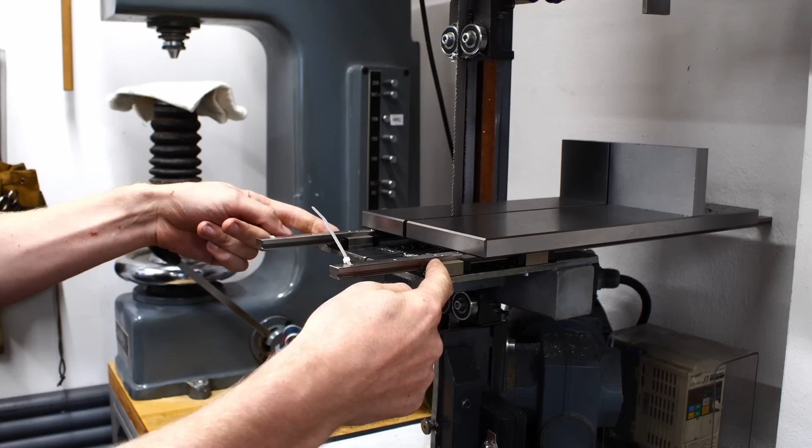People like Mössner sell vertical bandsaws with an infeed table too, for example with servo drive. So what I built here is, a friend of mine gave me two NSK linear rails size 12. Here you can see the trucks, there are 4 of them, and the linear rails, they are too long, I need to cut them down still. It's just for proof of concept now. 15mm thick steel plate for the table, ground, and a 70mm tall fence that's square on both sides of the blade.

Having the fence on both sides of the blade is important, so when you cut something, it's supported on both sides and just gives a nicer sawing experience. The fence on the back and the saw blade coming through, the idea behind that is to have a central clamp in front here that pushes the work back onto the fence. If you look up Robin Renzetti's roll-in saw, he has shown it numerous times on Instagram for different setups. That's exactly what I'm recreating here.

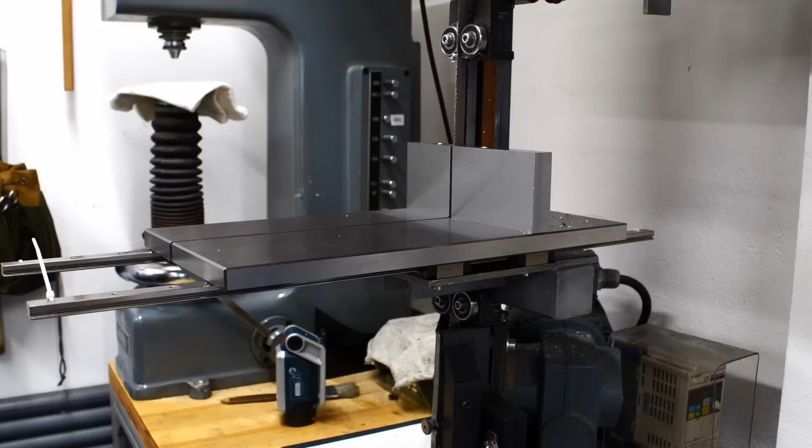I'm still waiting for the quick acting clamp that pushes up against the fence, but that's details. Definitely video coming on this. I'm working on it. It's built in a way so I can cut, I think, 150mm diameter max.

Since the fence is 70mm tall, the real limit is more like 140mm and smaller in diameter, because otherwise the center line of the round material goes over the fence. That's a little bit hard to hold, but 140mm is quite decent.

Also, the length of cut is 200mm, and if I need the saw as a regular contour bandsaw, I can just pull out these two screws, and these fences are doweled in. They are aligned with two dowel pins, and you can just pull these off and use it as a regular saw. It has no automatic infeed currently, it's just me pushing here, which is already way nicer than pushing the work over the table.

I'm thinking for an automatic feed either a very simple gravity feed, a big honking weight off the back of the machine with a wire rope, or a pneumatic cylinder that has an oil dampener added to it. So the idea is you put your work in here, you have your quick acting clamp, boom, pushing up against here, then you can just saw straight through the material.

And this allows you to split round material very closely to final thickness, especially if you start out with something that's already a round disc and very thin, and you just put it up with a square so it's vertical, and then you clamp it, and then you can just slice it through the center line, even if it's just 10mm thick. And that's something that I wanted for a very long time, because I like the bandsaw for material removal.

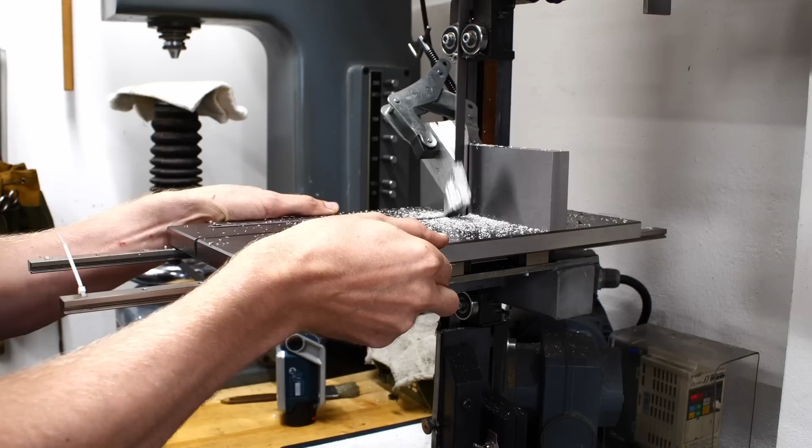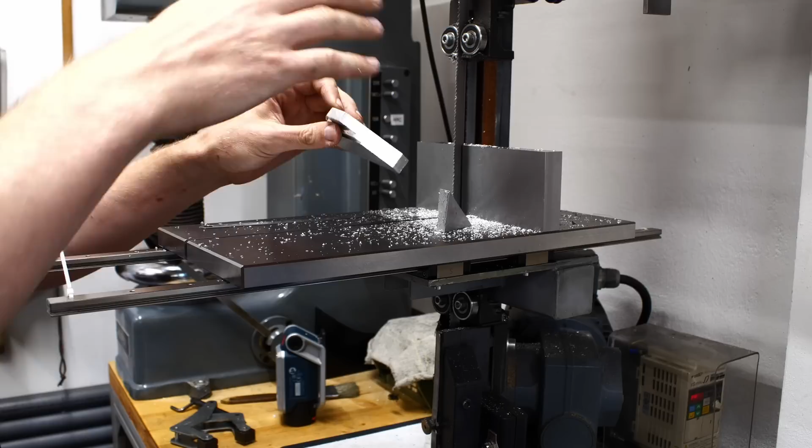And within the height limitations of the bandsaw, cutting straight lines with the length of the bandsaw like this, compared to cutting flat on the table like this, gives you a nicer cut. This gives a straighter cut and just overall a nicer finish, so you can cut with less stock for finishing, and also less waste. So that's very beneficial.

You can also do flat cuts like this. And of course you can also use it for material removal, like cutting out the corner. So the possibilities with a bandsaw are endless.

And I think a vertical bandsaw is way more valuable for a shop than a horizontal bandsaw. With a horizontal bandsaw you can basically only cut off material from a stick. Yes, you have options like bolting things to an angle plate and holding that in a vise, but a vertical bandsaw in my mind gives you way more saw for less footprint. So keep your eyes open for the video on this thing. It will take some time because I'm waiting for the quick action clamp here.

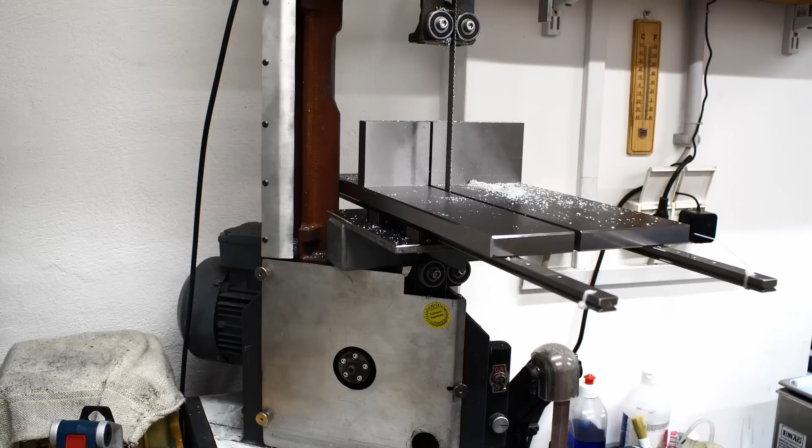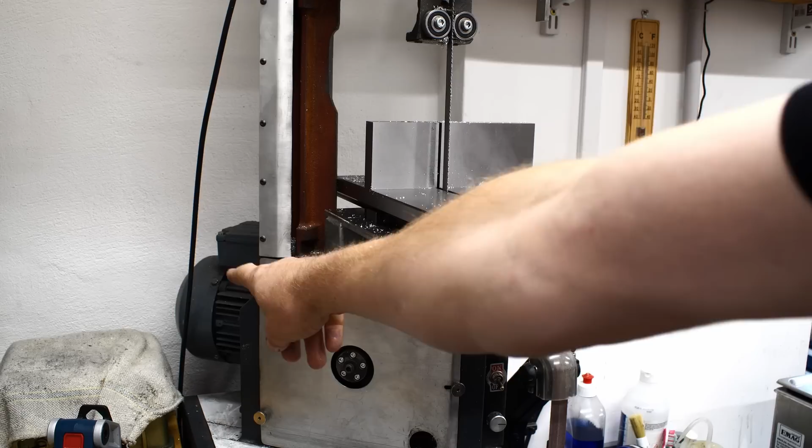And for those who don't know this saw, this is basically the standard 4x6 bandsaw that's sold by everybody in the US, Grizzly, Harbor Freight. I took it off the stand, I removed all things not necessary, put it on a stand, made a table for it, and now added this infeed table of course. And I also replaced the original motor and gearbox with an industrial motor and a worm gearbox because the old one died on me. That's the bandsaw infeed table.

I also did some recreational purchases for the Deckel FP1 tool room milling machine. To be honest, it's two pieces of equipment that I do not really need, but that I really wanted. One is the 40 taper high-speed head that runs 6,000 RPM, and the other one is an XY compound slide that fits on top of the indexing head, and that's used to machine multiple radii on top of the indexing head.

And there is a famous Palmgren XY rotary table. Adam Savage recently showed this thing on Tested, and they built it the wrong way around. They have the XY table and the rotary table on top, and that doesn't really make sense as a combination. That's just a rotary table and an XY table. But if you do it the other way around, if you have a rotary and an XY table on top, you can use the XY table on top to shift around the center of rotation of your workpiece. I will show that to you in a second on the real deal. But be aware of those Palmgren tables.

They are kind of obscure and nobody really seems to know what they're made for. This will be a quick one because I need to tear it down first. I need to fix a few things on it. But this is one of my recreational purchases for the Deckel FP1 milling machine. This was more a want-have than a need.

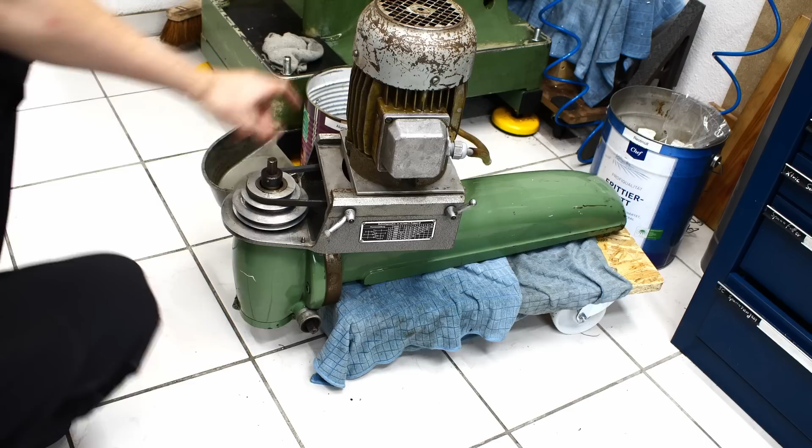This is a 40 taper high-speed head running up to 6,000 RPM. It has a separate motor and a belt drive for the spindle. So compared to the mill itself with its main spindle, these are rather quiet because there's only a 3-phase motor. I think it's 0.5 kilowatts, 0.75 kilowatt. So quite the monster. Not really. Belt drive and the spindle.

The spindle is a different design. It looks the same like the milling machine. It also has a quill with 16 millimeters travel, 40 taper internal, so it takes the regular tooling from my mill.

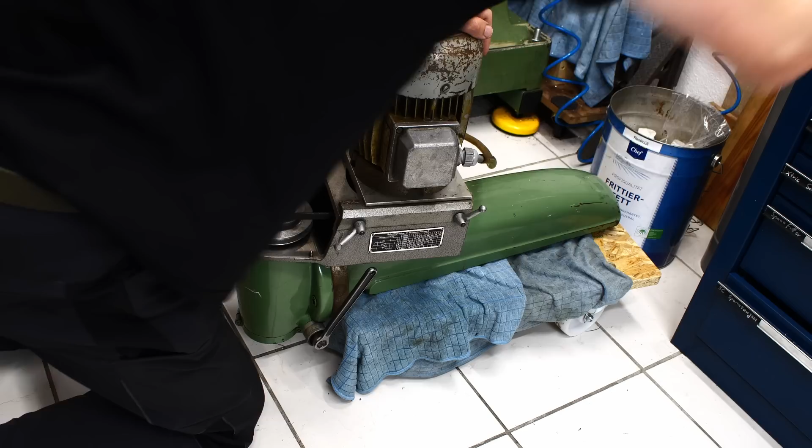But the Deckel FP1 main spindle, the geared head, is needle bearing, and this one is angular contact bearing. So these run a little bit smoother. They cannot take as much load as the needle bearing head, but they are a little bit, well, smoother.

But as you can see, it's very grimy. It needs a little bit of love. The dial here has some rust on it. Well, could also be just caked on dirt. I think I'm going to take the quill apart, or the spindle, because the bearings sound a little bit dry. I hope there is nothing wrong with them. So that's the high-speed head.

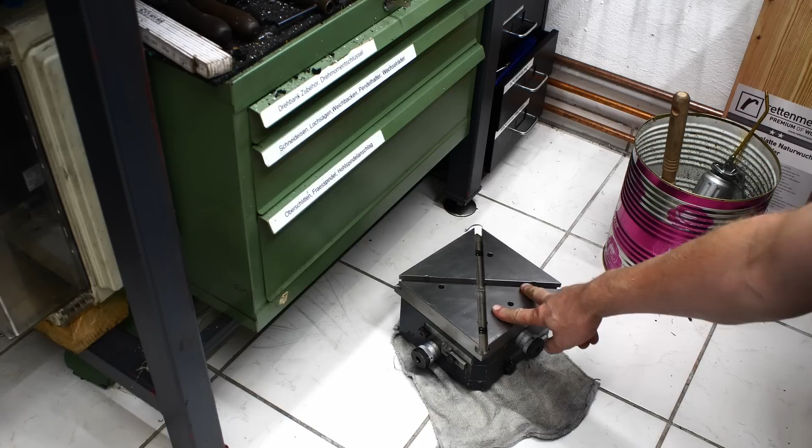I'm running out of places where to put accessories for the milling machine. Down here I have the XY table that goes on top of the indexing head, and I have a short video section on the usage of this thing. Not a detailed view yet, but you will get an idea what this is for. So let's have a look.

I got a quiz for you. What does a 1,000-kilometer road trip, meeting some friends that you only know from the internet, and a one-night stay in an artist's Airbnb give you? Well, some accessories for the Deckel FP1 tool room milling machine. We got a faceplate. Both of these accessories fit the indexing head.

I have an original faceplate, which is 300 millimeter in diameter. This almost acts like a mill table. You use this just like on the lathe. You use strap clamps or C-clamps, cam-twist clamps to hold work to it. And if you're a little bit of a savage, you can also drill and tap holes into it as needed. A lot of people do that, and most of the used faceplates, well, they look like that.

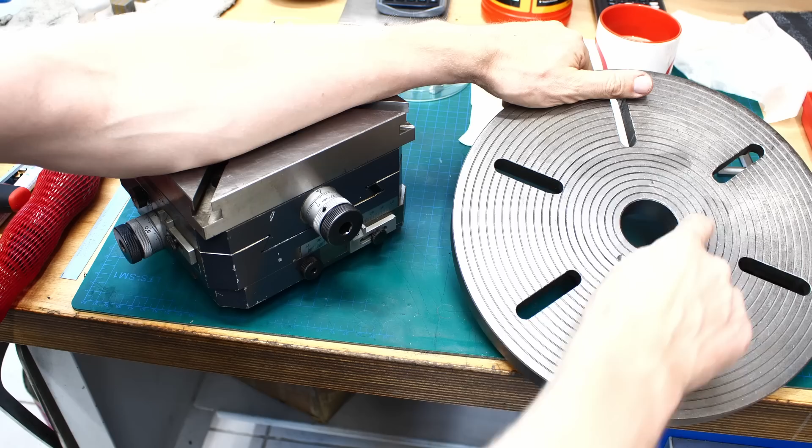This one is in excellent condition. It only has these 4 drill marks where somebody drilled a hole circle slightly too deep. But at least after 4 holes they noticed it. Apart from that, it's just a little bit dinged up. Should be fine after a light stoning.

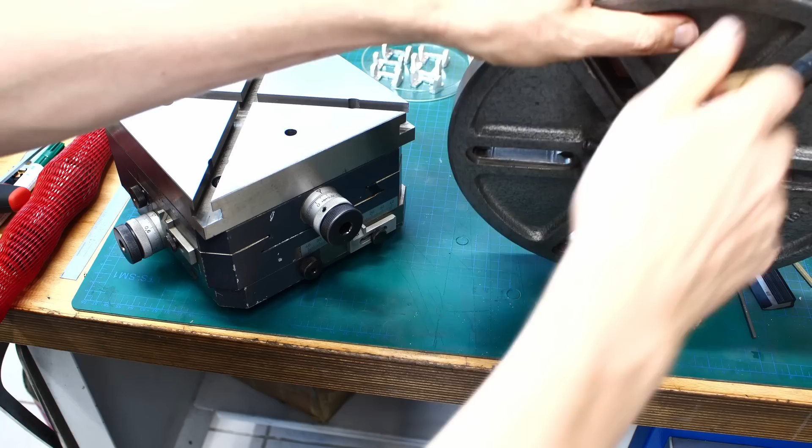And all these accessories have the interface, a cylindrical register with the 4 set screws that directly goes onto the face of the indexing head. I was very skeptical about this interface, but this is really rock solid and surprisingly repeatable.

This thing is bloody heavy, but this thing is even more so. This is basically a solid chunk of iron. What's this? Well, it's heavy. It has the same interface that goes on to the indexing head on the back side. And then it's basically a cross slide. It has an x-axis and a y-axis, graduated in 10 micron increments on the dials here, very nicely made. Has engraved scales on here and an adjustable 0-point marker.

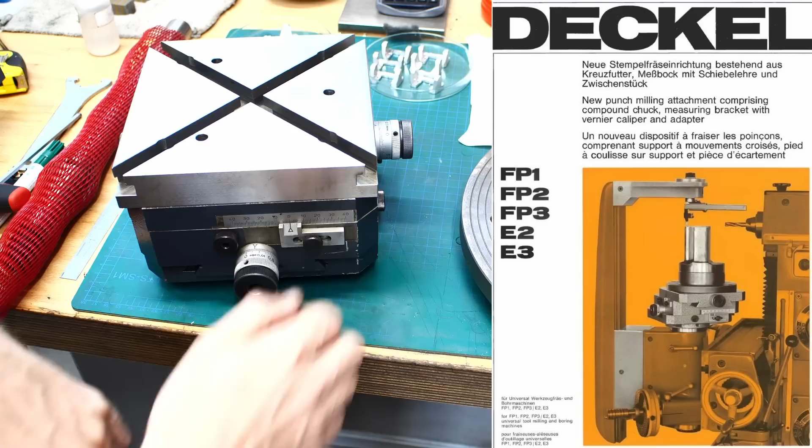So what's it used for? This belongs to the punch milling accessory or the punch milling system. You use this on the indexing head, you put your part on top of it, and when you want to mill radii, you always need to put the center of the radii that you want to mill on center with the axis of the indexing head. Normally you do that by tapping the work around and indicating it in with a dial indicator.

This makes it a little bit easier, especially if you have more than one radius to machine, because you can just offset the part in its setup without resetting it up and move it to its new center location, machine the radius. Then you can shift to the next radius, and that way you can machine quite complicated geometries on a manual milling machine using a rotary table without having to re-set up for every single radius. I will put this on a milling machine and we will see how this works out.

Okay, let's quickly look into the manual of the Deckel FP4M.

This has to be the nicest illustrated machine tool manual ever. They had these extremely nice hand-drawn pencil sketches for everything in regards of the machine. And here is the compound chuck. That's what they called it. Use of the attachments, number 7, compound chuck. And yes, this is for the Deckel FP4M, which is a substantially larger machine, but the idea is the same.

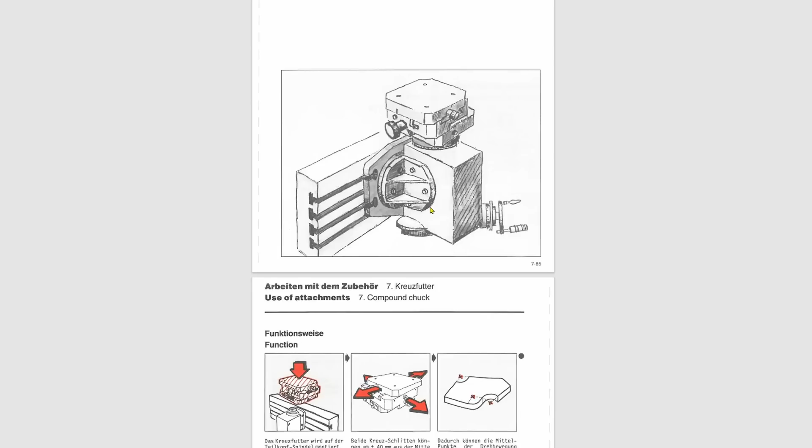So it's used in conjunction with the index head for machining contours composed of straight lines and circular arcs. And that's exactly what it is. It's a very fitting description. Here you can see it up against the apron with the indexing head. The indexing head is the same as on the Deckel FP1. They used it up to the size 4 machines.

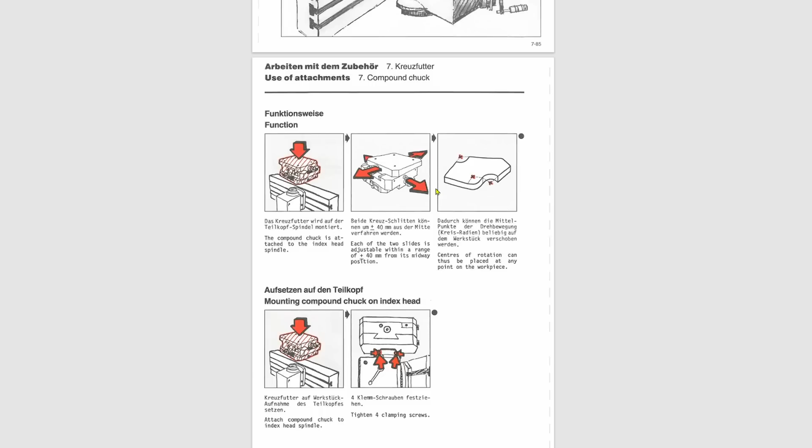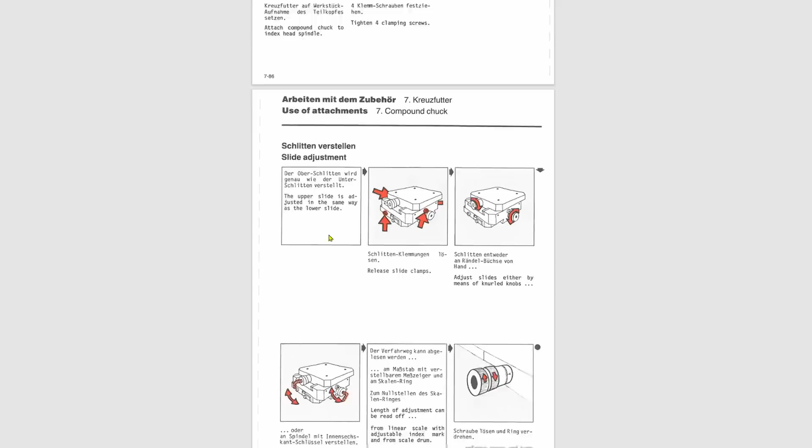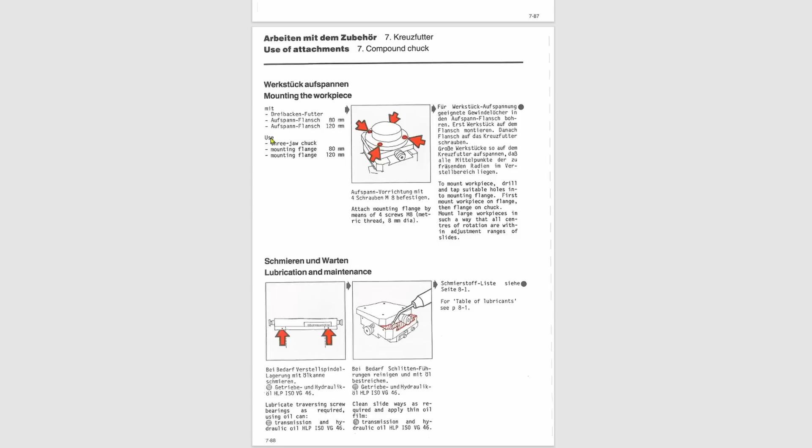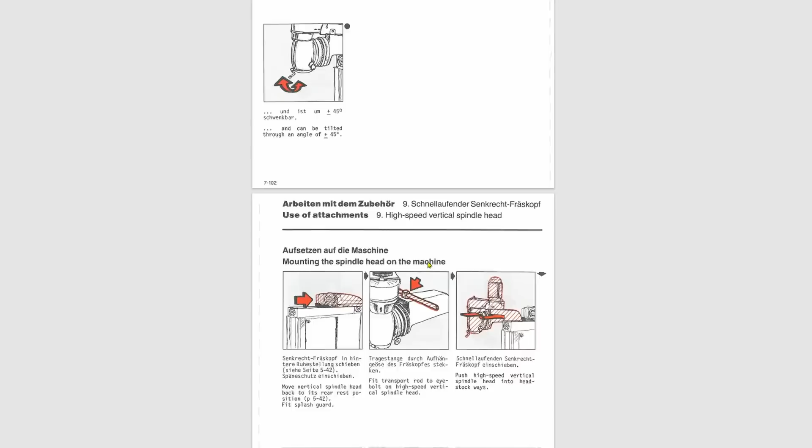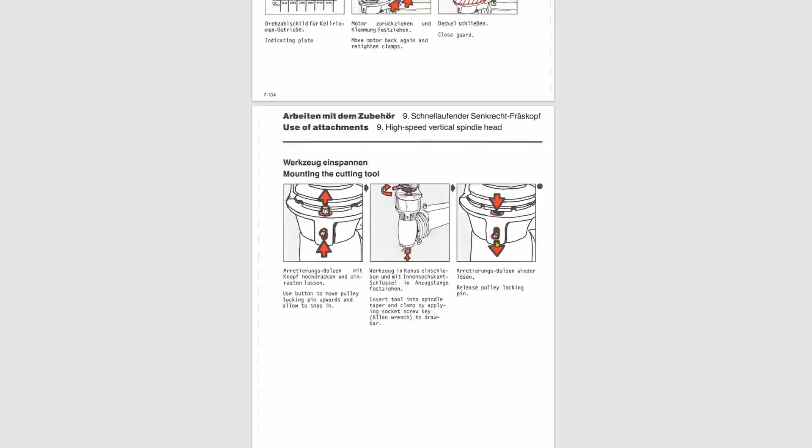There are other things too, spiral milling attachment, which is a fairly complicated item to operate. There is the FP4 high-speed head, which is a little bit different. This one already has a spindle lock to lock the spindle on the push of a button, which my high-speed head doesn't have. So changing tools on these is always a little bit painful. You can't put them in low gear to lock the spindle either. The FP4 also had a double swiveling angle head to mill compound angles.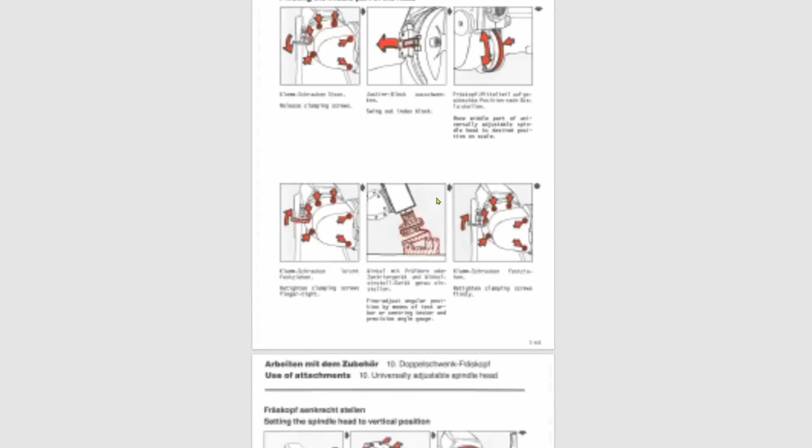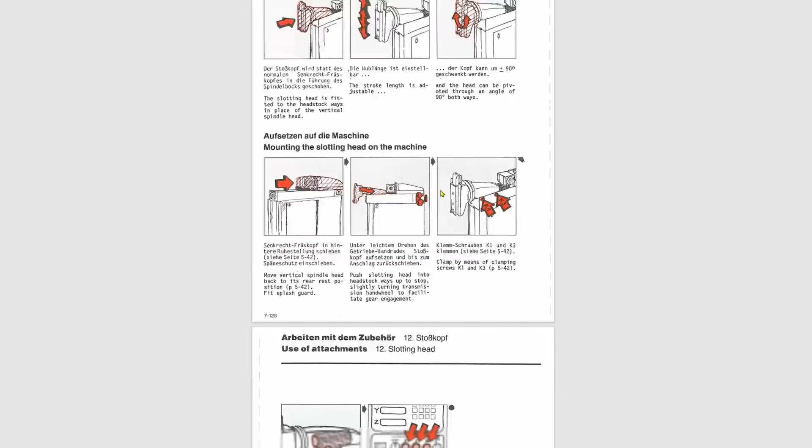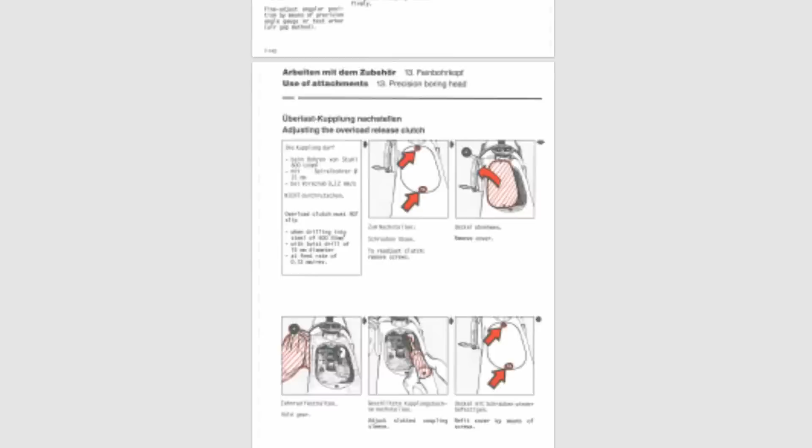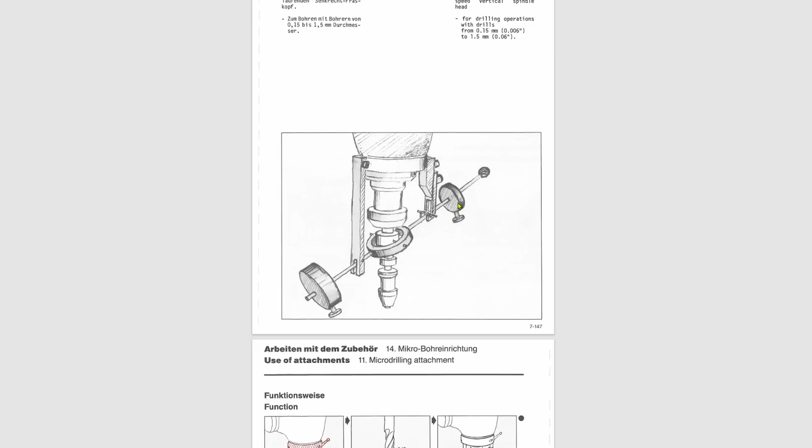So this manual shows up on the internet. It's quite interesting to see what's possible and to see some of the accessories that you rarely see on the internet. Slotting head, precision boring head. I think they even show the grinding head. This is the micro drilling attachment. This goes onto the end of the quill to drill from 0.15 to 1.5 millimeter holes using gravity feed. You balance it out with those 2 weights, and then you offset one of the weights a little bit, and then you can just drill with gravity feed.

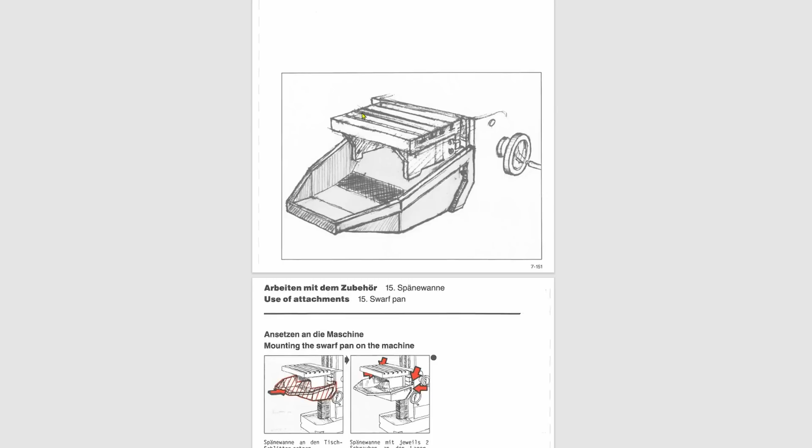This was pretty nice on the Deckel FP M and NC machines, on the controlled machines. There's a chip pan that hooks up to the apron and kept the mess to a reasonable level, but still allowed you to access the milling machine completely all the way around. If you run flood coolant, it's a pain because you spray the entire surrounding of the machine.

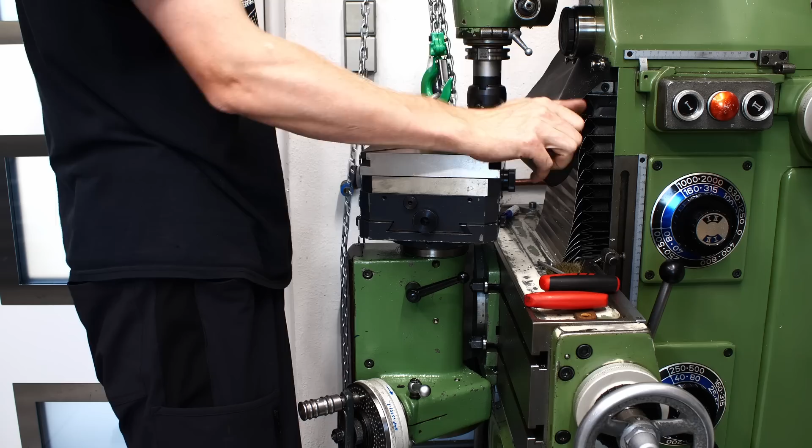Since the sliding chuck is so heavy, it's a little bit tricky to get it onto the indexing head. I tried it by hand, but lifting it on top of the cylindrical register boss of the indexing head and getting it into alignment is quite tough. So using the overhead crane makes it way simpler. And my lifting eye attachment that I use for the rigid table of the mill also fits the T-slot of this sliding XY chuck.

Once it is in place, you just tighten the 4 set screws that engage into matching dimples in the nose of the indexing head, and they are positioned in a way so that they pull down the item that you mount on the indexing head face. They contact at the sides of the dimples that are drilled into the spindle. And in the ideal case, you tighten them crossover, opposite sides and then 90 degrees the same, just like you would tighten wheel nuts on a car.

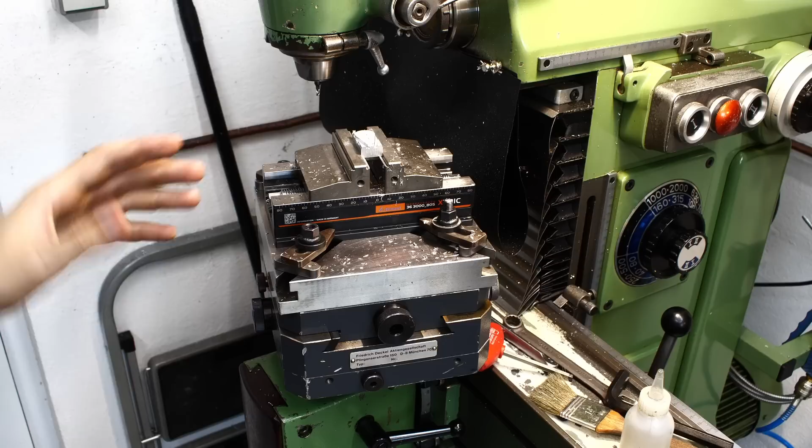As you can see, the thing sits on the indexing head. I put one of the self-centering vices on top of it. The T-slot plate here is shop made. That did not come with the XY chuck. Deckel called it a Verschiebefutter, which means literally a sliding chuck. What it really is is an XY cross table.

And it just had a few threaded holes in the top plate, but somebody at the former place this thing lived in made this T-slot plate with the 45-degree offset T-slots. It looks nice, but I'm not the biggest fan of the 45-degree T-slots. Not so sure about that. But with the self-centering vise on top, it seems to work out.

I did a little bit of machining on a piece of aluminium, and I will zoom in in a second. And all I can say, this XY slide on top of a rotary axis is a complete mind bender. My head hurts from doing just this simple part without any precision needs.

Just to figuring out which axis to move at which time. Ignore the witness marks in the center. This is just really super rough, done with an end mill in one roughing pass. No finishing, no nothing. Just to figure out the geometry that this table creates.

So I have two radii on both ends of this contour, and they're connected with a tangent line on each side, and each of them has a central bore. And it's all done in one setup without disturbing the part, which is kind of cool, I have to say.

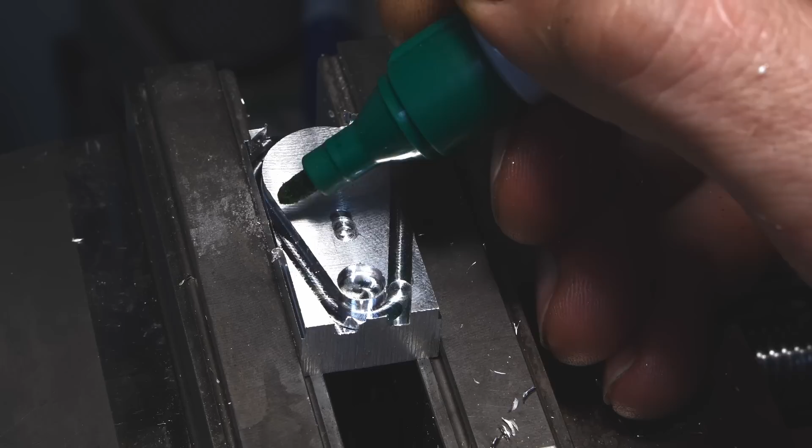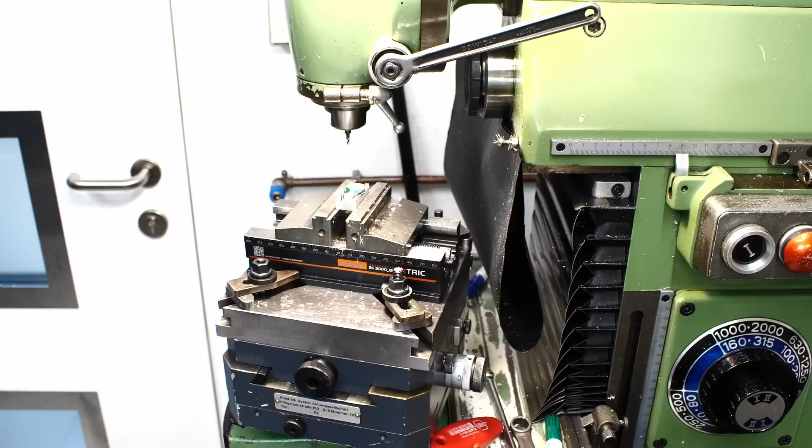So let's add some more features. Let's add a radius cutout on both sides, like this. Just eyeball, nothing precision, just to give you an idea of how you operate this. So this is not a manual video or a tutorial. This is an absolute, Stefan tries to figure out a new piece of equipment, which he is absolutely excited about.

So for starters, I put the indexing head back in its 0-degree position, because it just makes things easier to figure out. So then we crank the x-axis back to 0, because that's the center of rotation. Well, and also in the y direction. Okay, now we are at the last center position that I used on this contour, which is the center of this rear bore.

So to get my center position over to my cutouts that I want to cut, I'm using the x-axis of this cross slide, and I crank it over. And I could use now the dials to exactly find my geometric center. Okay. Now if I went down and if I rotated the part, I would cut a hole in the center of my geometry. Just like this.

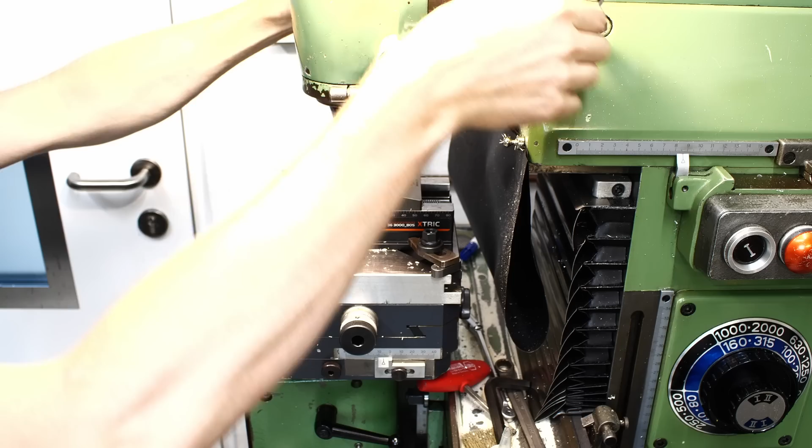So I'm moving over, let's say, 6 millimeters, which gives me kind of the outside contour here. Now I can plunge down and start machining my radius. Okay, cut number 1 on this side.

And now I need to go to the other side of my contour. I cannot move the y-axis of the machine, otherwise I would just cut a larger radius. I need to shift the part on the rotary axis of the indexing head. So let's go back to 0 and then 6 millimeters in the other direction. Of course, since we're using dials, we have to consider backlash, so we go over 6 millimeters and then we go back.

So here's 0, and we could also lock all the axes, but let's not overcomplicate things. So let's start at 0 again, plunge down, and then we rotate out to our diameter. Okay, yeah, so now we added those two features too, without having to reset up. And that way you can create a whole bunch of machining operations without disturbing the setup. I guess we push this back under the lathe until I need it in 5 years.

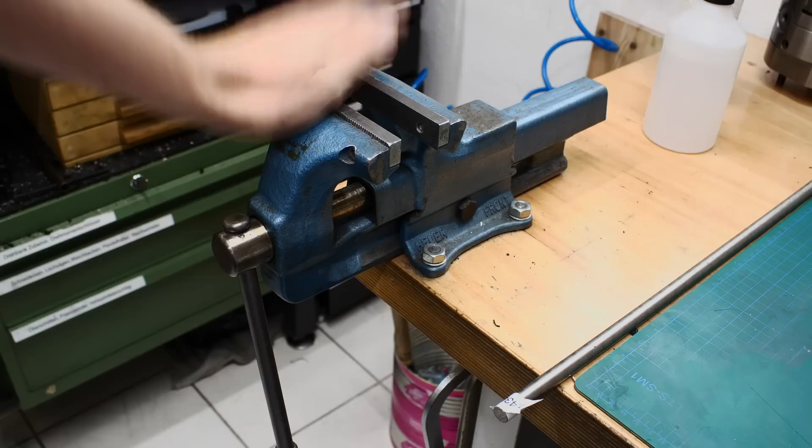Quick word on bench vises. I think, well, yes, you need a decent bench vise. These days, this is my preference. Heuer Brockhaus. These are forged, not cast. They are quite hard to destroy. Yes, you can destroy them if you watch Fireball Tool, but in regular shop use, you will have a hard time breaking one of these. You can pick them up on the used market for very little money.

The problem with these is they come with serrated jaws, like a flat knurl, and to be honest, that's quite useless for 99% of general shop use, because who likes a nice flat knurl in his work? What I do when I get these vises in, and we did that at work too, we take out the jaws, that's the original flat knurling.

Looks like it's done with a large fly cutter at a high feed. We take the jaws, we flip them around, we surface grind them, and you have to resurface grind them from time to time. And we use them that way. Our preference always has been hardened jaws and very smooth. With those, if you keep them clean, you don't leave marks on workpieces.

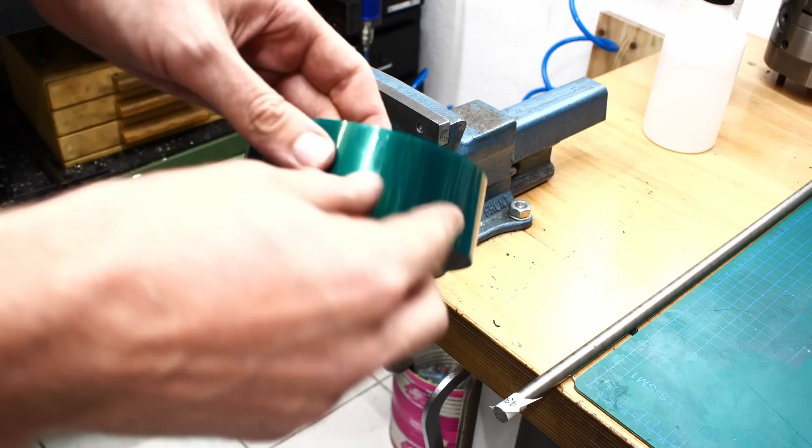So if I need a real jaw that's not scratching, for example, a black oxide finish, I will put on this stuff. This is powder tape, very, very resistant plastic tape, or regular blue masking tape. Put it on the jaws, and then you can work on parts without leaving micro scratches on very soft materials or very sensitive parts like black oxide or anodized surfaces. So that's my 5 cents on bench vises for a machine shop.

There is also the other style that's also very common here in Europe, the Boley or Lienen vises that are cast, where the jaw is moving on the back. Those are also very nice, but they have one drawback. With this style here, with the front moving jaw, you can clamp long parts and have them extend down the bench if you have mounted it far enough to the front of the bench, of course. With the rear moving jaw, you can do that only extremely limited. So that's one of the reasons why I changed from the Boley vise that I used to have to the Heuer vise. Picked this up used, cost me like 50 bucks and one drive with the car.

Also, there are all these super large and huge vises and people having 17 vises in their machine shop, and I'm not sure why. Maybe it's the kind of work I do. I get very far with a single 100mm wide vise. And if I need a really strong vise, I can always clamp stuff to either my large drill press table or to my milling machine table. That's 500 or 700 kilos of mass that help me to work on stuff. At work we always bolted one of these bending fixtures to bend flat stock, but we just held that on the milling machine because it was a nice hard point to mount it.

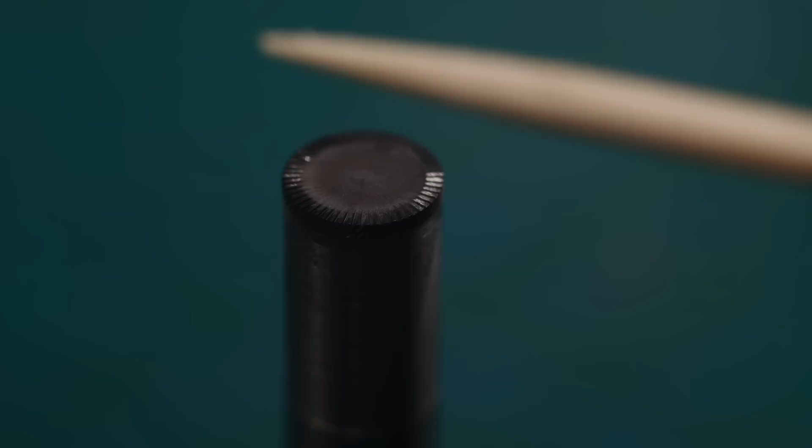And this is a 50 flute diamond end mill. This is 6mm diameter across, has 50 flutes, and there is a piece of, I think it's polycrystalline diamond, brazed to the end of a carbide shank, and then the cutting geometry is formed with laser into the diamond. And this is by no means a cheap tool. This is close to 4 figures. A very generous person sent this over to me. Let's call him the guardian angel of this channel.

And I want to fart around with it. Well, I will do minimal farting because, as I said, this is a horrendously expensive tool, and maybe there will be the day where I can use it for something useful apart from doing a 5-minute video here on YouTube. So you see the cutting geometry, and this end mill is made to cut tungsten carbide. And it's made to cut certain ceramics like zirconia.

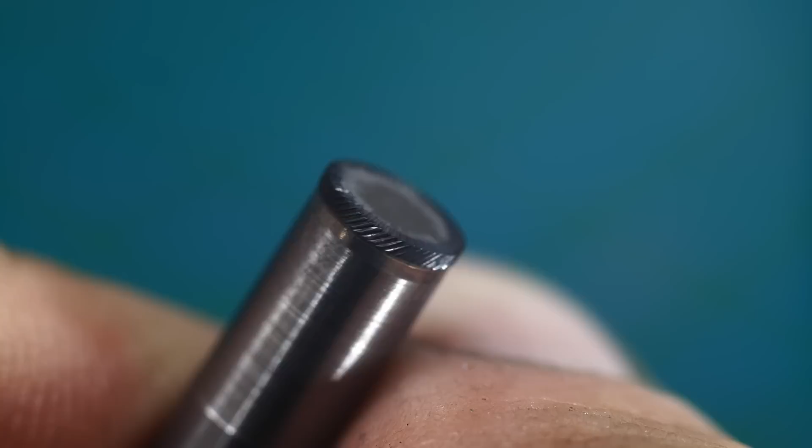What? You can't machine carbide. Well, you can, and you can for quite some time by now. At my day job we use tooling from 6C to do drilling and thread milling in carbide, a few years ago already. It worked quite well. When you do thread milling in carbide, the threads come out beautiful, way nicer than many tapped threads in steel.

So we have this end mill, and it is actually cutting, not grinding. So it is a mill, or an end mill. It's completely insane when you look at it. Normally you would use this on a machining center with very controlled cutting conditions. I have 2 machines that can run this end mill: the Sorotec CNC router and the Deckel FP1.

The interesting thing about this, as far as I know, and I'm no expert at all, you can scale the cutting parameters for these up and down very far. I'm running this at 2000 RPM on the Deckel mill with 20 millimeters per minute feed. You can calculate the chip per tooth yourself.

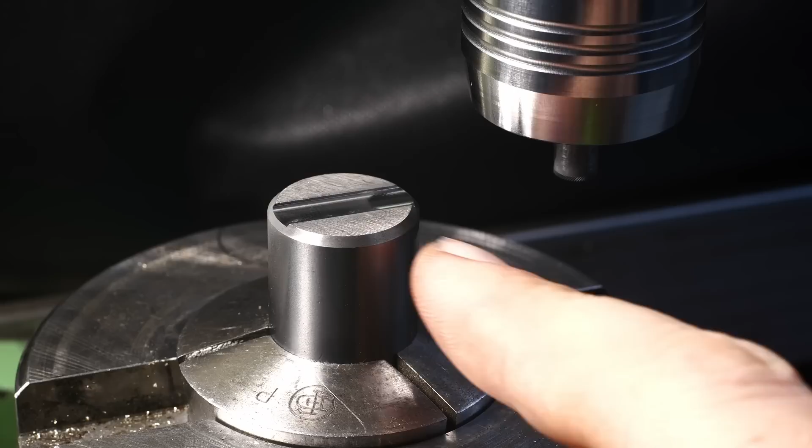This was milling carbide with a specialized end mill for cutting carbides and ceramics. As you saw, the cut runs relatively uneventful. The only problem that you have is the fine carbide dust that you're blowing all over the shop, because you have to run these cutters with compressed air, because I suspect they don't like recutting carbide dust or carbide chips with their flutes.

And this is, I think, a 50 flute 6mm end mill with a solid diamond end. And the flutes are, I think, laser cut into the diamond. So this is very wild technology here. But it's approachable if you have like $900 for an end mill. It can be done on normal CNC machining centers; you don't necessarily need something like a Kern Micro HD or a hard cut machine like a Röders or a Kitamura. You can approach this on normal machining centers.

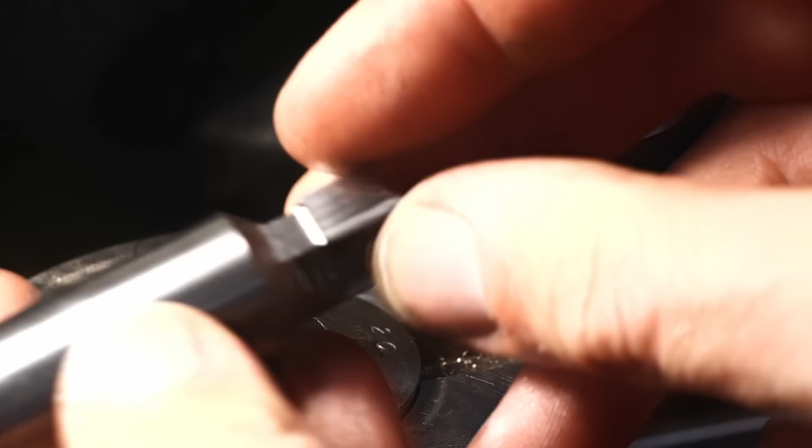They also make drills and thread mills to cut into carbide. It's interesting technology, nothing I will use in general here in my shop. This was just a fun little test with one of those end mills, cutting a 6mm wide, 0.5mm deep slot in 5 passes into this piece of carbide. That's a piece of carbide, a 20mm carbide shank, and there is some machined feature on the other end. Somebody did some milling trials on it already. So that's my test cutting carbide.

I will put this end mill away and keep it until the day I absolutely have no other choice than to use it. But that's probably the first time somebody has cut carbide with a dedicated 50 flute PKD end mill on a Deckel FP1.

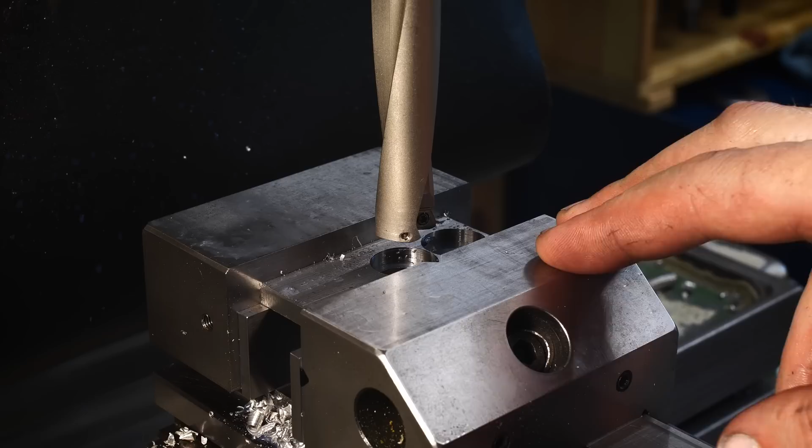Back to my new hobby of putting inappropriate tooling in ancient manual equipment. Here I have an ISCAR 19mm inserted drill. It has 2 inserts, one here, one on the other side. You usually see these on proper industrial CNC equipment, vertical machining centers, horizontal mills, and CNC lathes to remove a lot of stock in a short amount of time. You rarely see them used on manual machines, and I'm not entirely sure why.

A toolmaker friend of mine from Liechtenstein used a slightly smaller one. When I visited him, I noticed that he had one of these in a multifix tool holder on his small Schaublin 102 lathe, and he told me it works fine. You have to take a little bit more time than on a real 40 or 50 taper VMC, but it works and it's good to remove a lot of stock.

So a good friend of mine gave me this ISCAR drill, and I wanted to put it in the EMCO lathe, but currently I don't have a reducer sleeve for a 25mm shank to go in a boring bar holder. So I figured I have a 25mm collet for the Deckel FP1, and that's a rigid machine for its size, so let's give it a shot here. Teaser, you can see 2 holes here. It works, and boy does it work. So let's move the table over.

I'm using it like a regular drill with the quill, not power feeding, because I currently have absolutely no base of understanding how they behave without high pressure through coolant. Normally these drills are used with through spindle coolant, meaning coolant shoots down from the spindle through the tool holder, and there are channels drilled inside the tool and the coolant shoots out the end. I don't have that on the machine obviously because it's ancient, but I have a little squirt bottle, so let's give it a shot. 630 RPM, and this is mild steel.

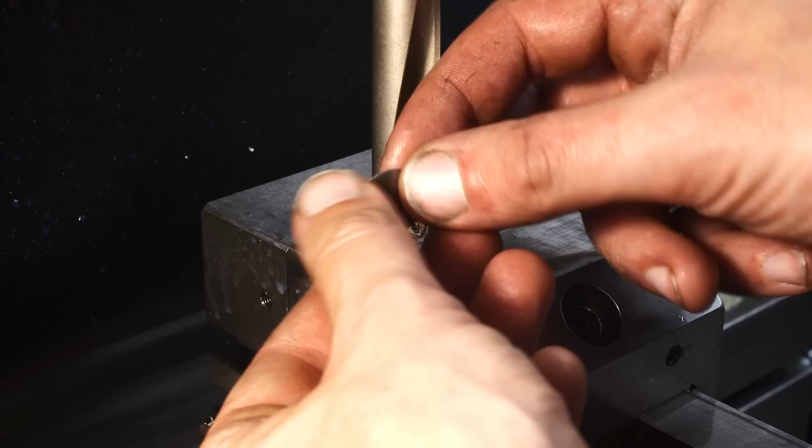This works way better than it should, in my opinion. These drills, when they break through, cut out this disc of material, super sharp on the edges. I heard stories that on CNC lathes and open frame tool room lathes these will fling out to the side and be a little bit dangerous. But on a mill, this doesn't seem to be a problem.

But you heard that the cut is really quiet, and there is not even a hint of chatter, no scratching noises. It's just behaving extremely well. And the pressure on the quill handle: I don't like large twist drills a lot. Without pre-drilling, they always seem to take a lot of force to get them to cut nicely. And this cuts really nice compared to a twist drill the same size without pre-drilling.

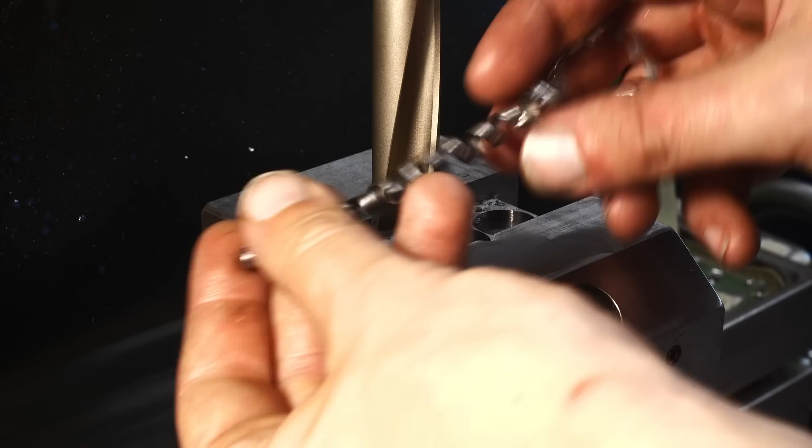It's not super fast. I think I could push it harder so it breaks the chip, but then I get into problems with coolant, I guess. Disclaimer, I have no real world experience with these on real machines, it's only what I see in videos. But these usually seem to break the chip extremely coarse when you feed them hard enough. They put out small curls of chip. You saw by hand feeding, I create this style of chip that doesn't break, but it comes out the flutes of the drill.

So yeah, seems like you can use these on manual equipment, and maybe it's kind of useful. I will keep this drill around. I have a box of inserts for it, so maybe this will find its way into my tooling setup here in the shop, and maybe you see it a little bit more in future. But I'm mighty impressed. I would not have expected this to work as good.

Here you can see the finish that the drill leaves. It has a little bit of scoring marks, probably because of the lack of coolant, but overall it's a nice bore. And as for tolerance, these don't seem to be precision tools because it drills undersized, as far as I can tell. On a CNC lathe, I heard that you can use them to drill out a hole and then put them off center and bore out the hole to final size. But I'm not sure if that goes that well with the insert geometry in this tool. We will look at the tool on the bench in a second.

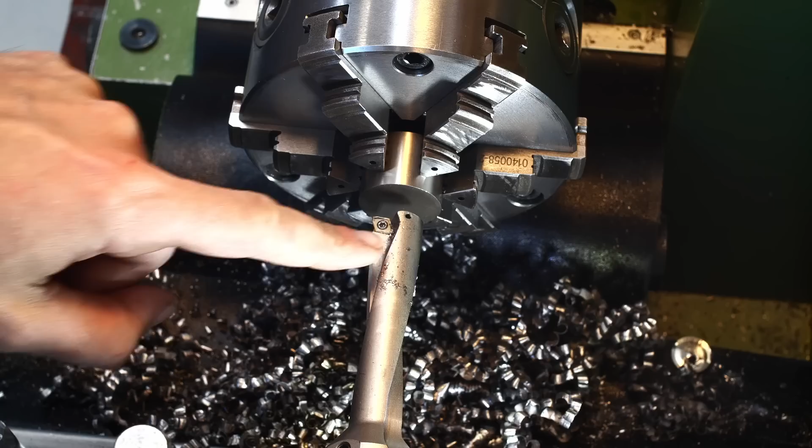I made a sleeve to use the inserted drill over here on the lathe, and well, I'm running out of stock that I can poke holes into. So this is a piece of 303 stainless. This should go fine, running at 600 RPM and hand feeding again.

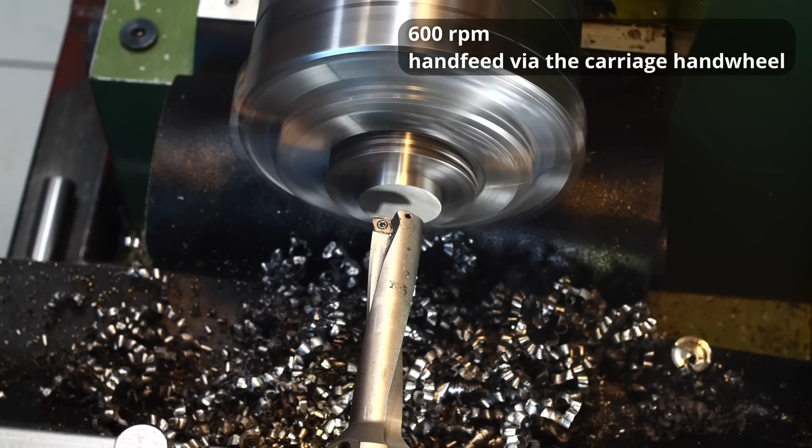So it works too, but over here on the lathe, it's not as stable as on the Deckel milling machine. The Emco is significantly less stiff than the milling machine. That's for sure. That's a weight difference of almost times 3. The Emco is about 200 and something kilograms, and the Deckel FP1 in its configuration is more like 700 kilograms. And all the components are just more beefy.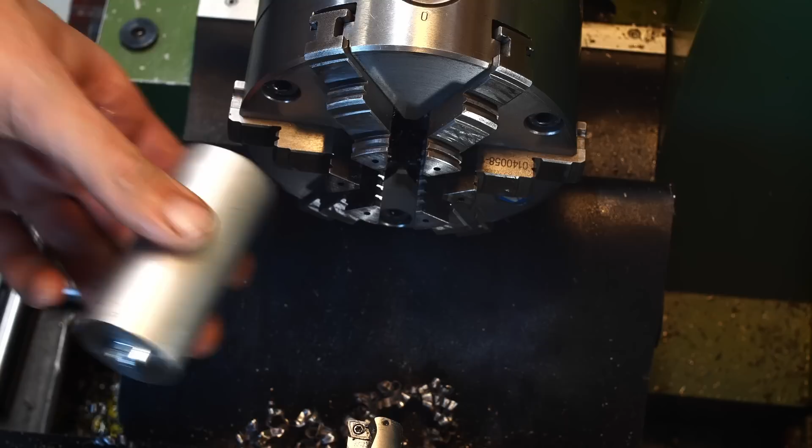It works here on the lathe just as on the milling machine, but I think the lathe is less stiff. Well, it is. I don't need to think. The lathe is about 200 and something kilograms, and the Deckel FP1 in its configuration like I have it is about 700 kilograms. And all the components on the Deckel are just more beefy and heavier. Spindle bearings on the Deckel are larger diameter. So that's the reason why it doesn't run as smooth over here on the lathe as it does on the milling machine.

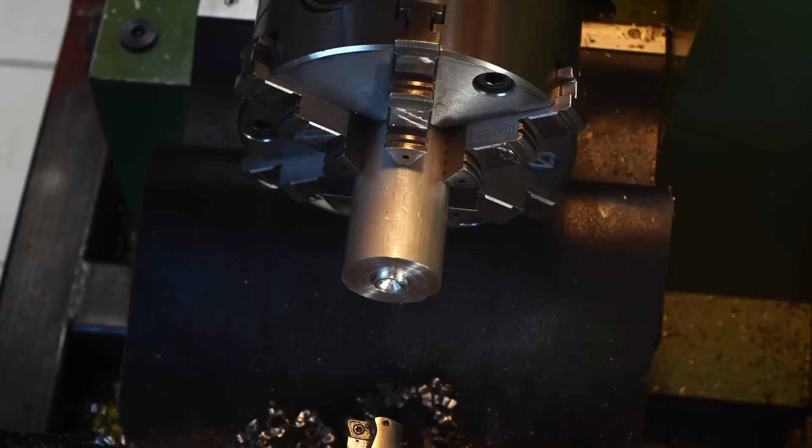Despite that, I think this could still be a very valuable tool for what I do, especially for aluminium work. I'm doing a good amount of this diameter aluminium parts that need a large hole drilled and bored out. Normally you need a pre-drill, a little bit larger drill, and then you come in with a boring bar to clear out the material. With this, I can poke a large hole in there with a flat bottom, and then come in with a boring bar right away to remove a lot of material in short order.

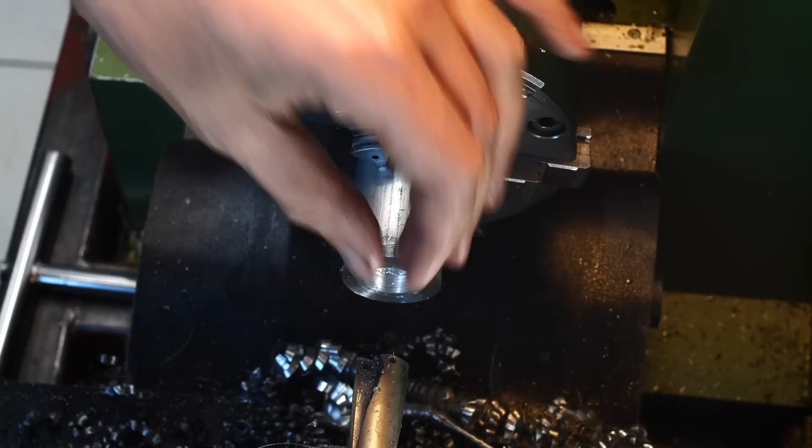So let's see how it behaves in aluminium, running at 600 RPM too. Well, that's behaving extremely nice. I think I will definitely keep the tool around for purposes like this. Let's see if we can enlarge the hole with this tool right away.

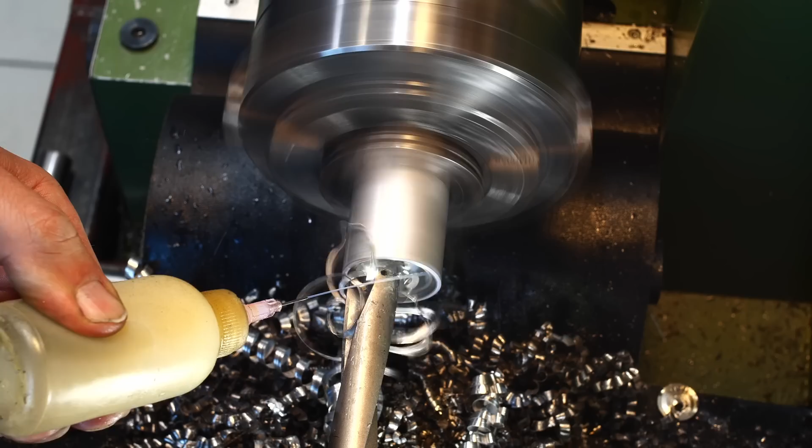Yikes! That wants to sing. Yes, you could use it to enlarge the pre-drilled hole with the boring bar, but since this is a 5 times diameter indexable drill, it wants to sing if you put it off center because it's not a balanced cut on both flutes anymore. So that's possible, but wow, my ears.

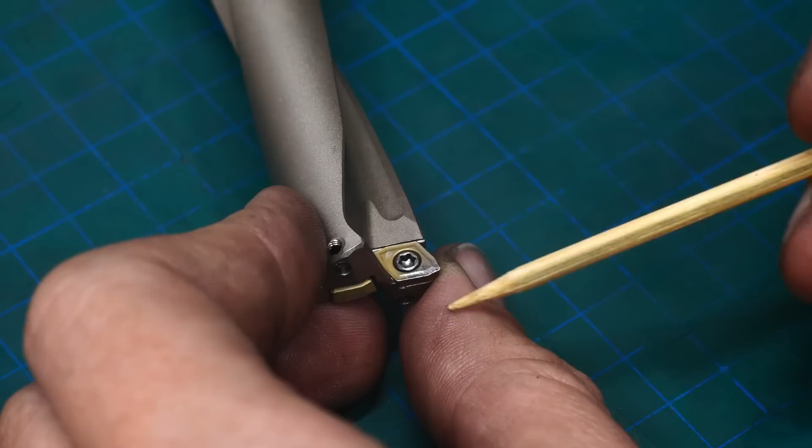So that's an option here, and that's the drill in a multi-fix boring bar holder. In there you can see the split sleeve down there to adapt it from the 25mm shank to the 30mm boring bar holder diameter that I'm using. That's this tool. Here's the business end of this indexable drill. And you can see we have two inserts. They look like CCMT inserts, but they are not.

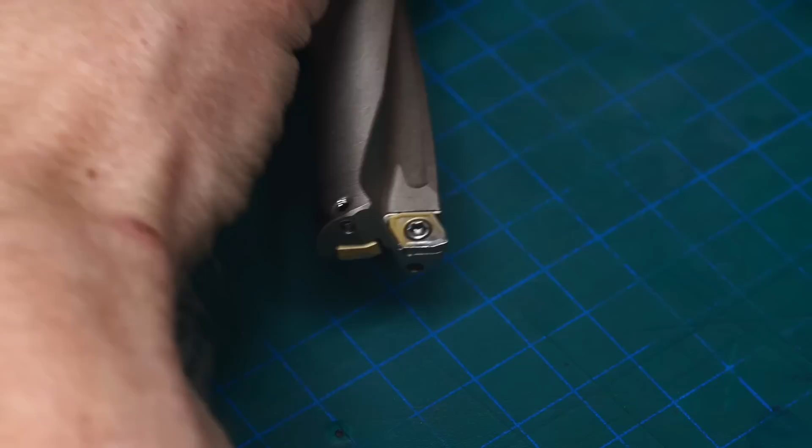As you can see, it has a similar shape, but there is an additional edge down here. So it's not a CCMT insert, it's a proper proprietary insert, as with most modern insert tooling, unfortunately. But that way they can optimize their inserts for the tooling. At least this drill uses 2 similar inserts and doesn't need one for the external cutting edge and a different one for the internal cutting edge. Both inserts on this cutter are the same.

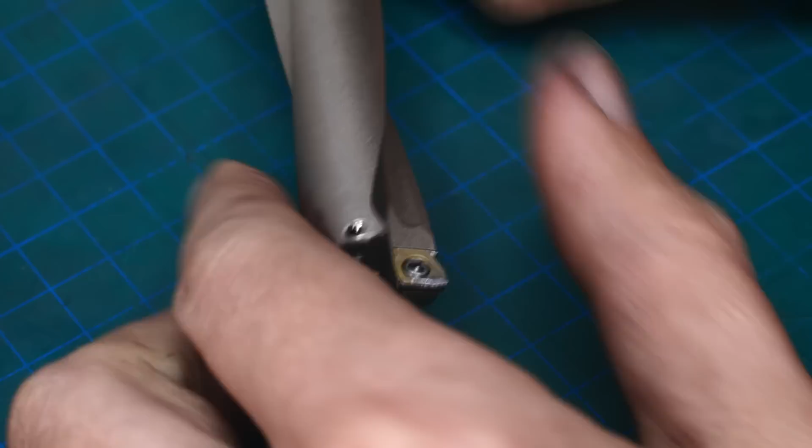As you can see, this one goes mildly over center and clears the inner portion of the bore, and the other one extends out to the OD of the drill and clears the material on this side. Also, there is a nice built-up edge on this insert from drilling aluminum, but I'm not worried about that. The built-up edge will chip off the second you hit some hard materials again. So that's usually not a big problem with roughing tooling. On a finishing tool, built-up edge can be a problem, of course.

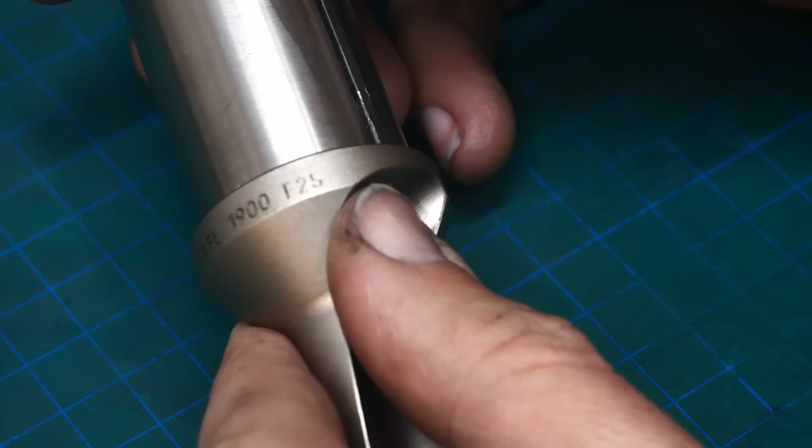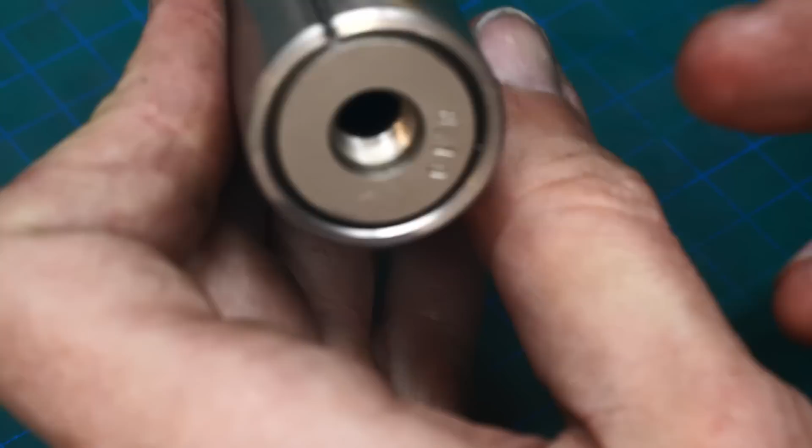So yeah, that's the business end of the indexable drill. And here is the number or the type of drill if you need to know. Mitsubishi TA FL 19 is the diameter, and it has a sleeve on it currently, 30mm OD, so it goes in my boring bar holder. So yeah, very nice tool. We have 2 wildly different tools here. One inserted drill that's kind of a roughing tool, and then we have a carbide milling end mill that's more or less the pinnacle of modern cutting tools.

Being able to make something like this on a CNC milling machine. If I had told my dad a few years ago that we were able to mill carbide now, he would be like, you're joking. And now this is a capability that very many shops have these days. I'm in the very privileged situation that I have great friends that gave these 2 tools to me. This is a little bit more reasonable in my shop. This is something approachable, but this is so much out of my wheelhouse normally. I would never purchase something like this.